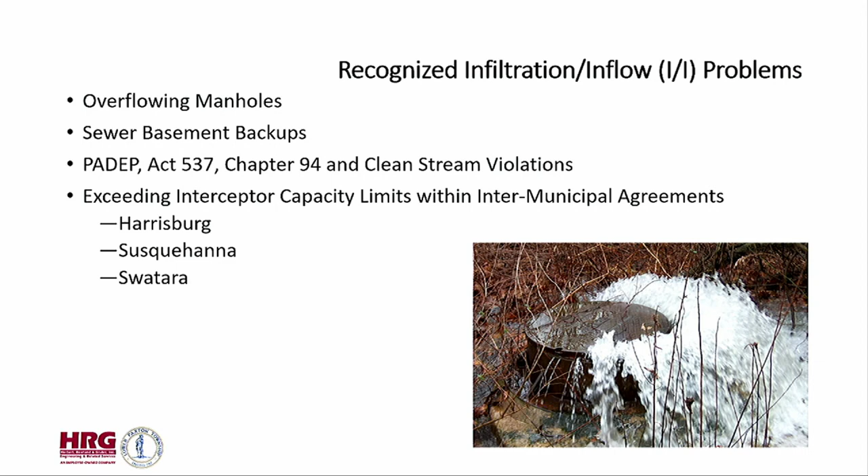Sort of why we're here: we had sewer overflows back in 1993, basement backups, which resulted in a DEP Chapter 94 and clean stream violations. We also exceeded our interceptor capacity at Harrisburg, Susquehanna, and Swatara.

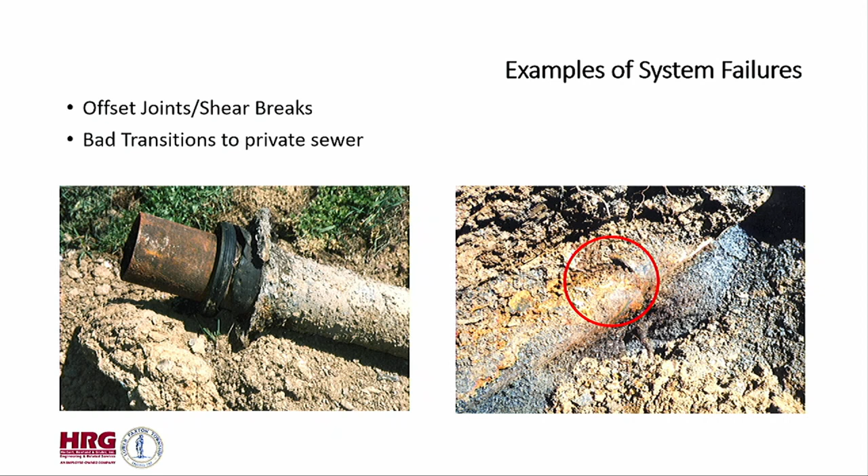The reason for these overflows and backups: the system was built in 1970 and made out of asbestos cement pipe, which fails, especially at joints. You can see in this photo to the left where this joint failure occurs, and then you also have actual missing pieces of pipe from improper backfill. There's another close-up of a missing piece of pipe that's actually in the building sewer portion.

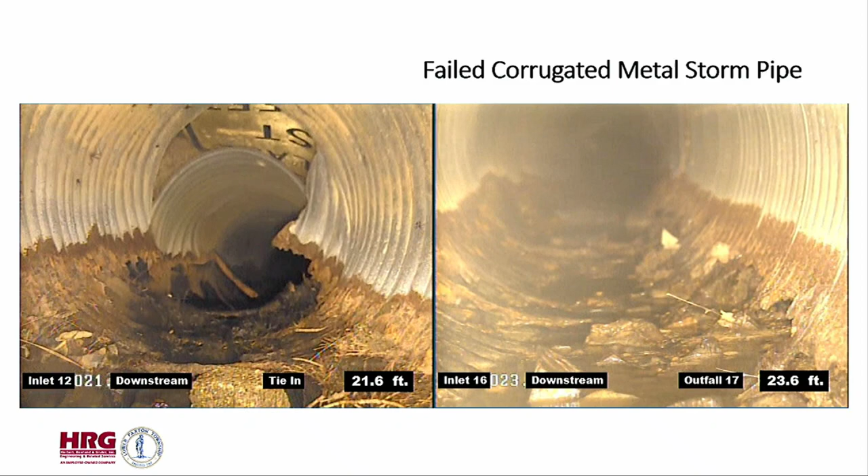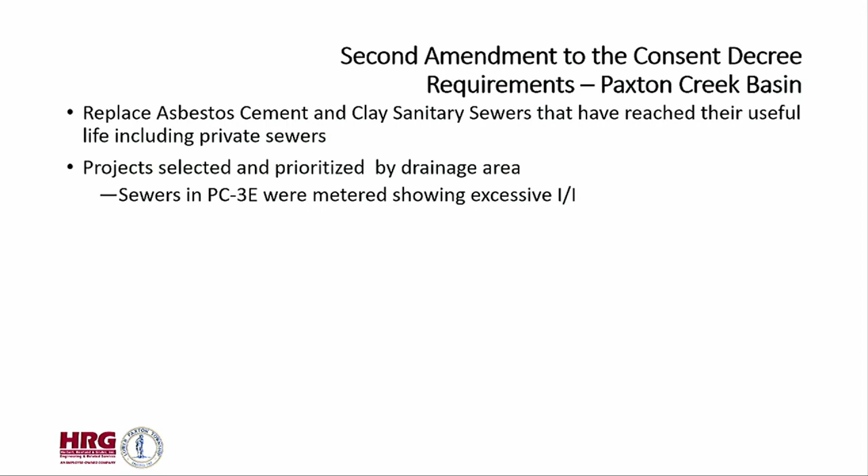A little bit more about the project and the deadlines for the sewer part. Our plan is to replace all the old cement pipe and the clay sewers. Your project was selected and prioritized based on sewer flow metering, and PC-3E showed excessive infiltration when metered during a storm event.

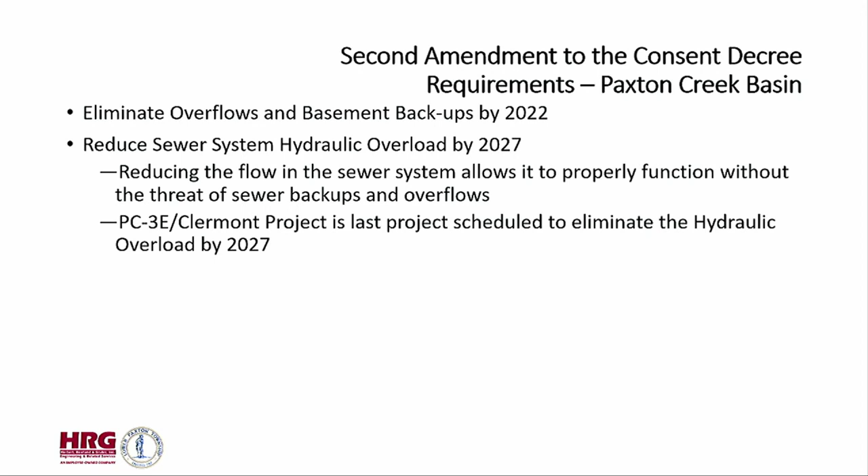So our goal was to eliminate the overflows and basement backups by 2022. This has been accomplished except for this area down to Goose Valley Road, which will show - that's our last overflow remaining in the township. Then the hydraulic overload must be reduced by 2027, and this Clermont project is the last project scheduled to eliminate the hydraulic overload by 2027.

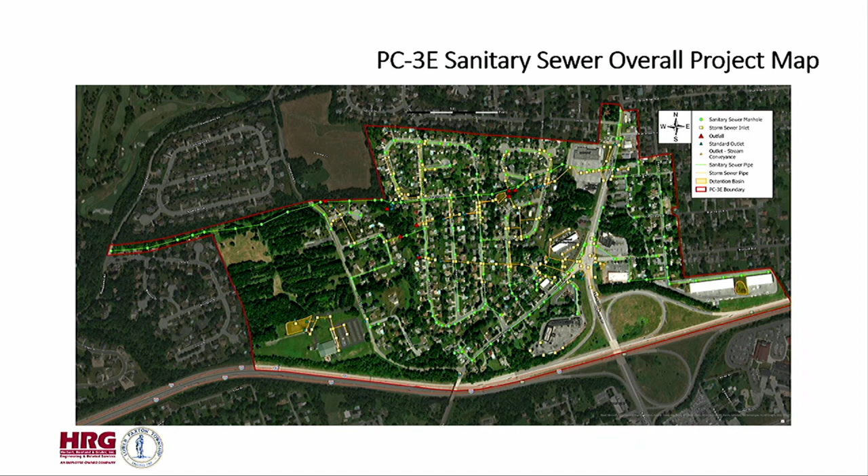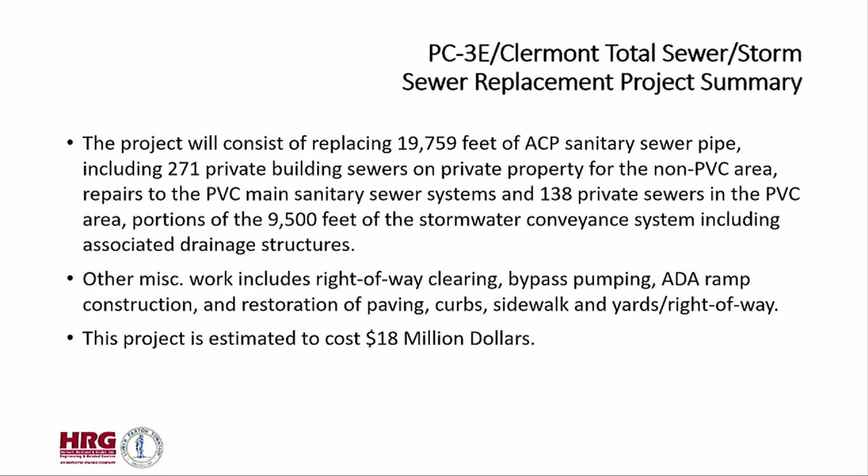The project will consist of 19,000 feet of sewer pipe, which also includes the private sewers. Most of you have already received those agreements for the sewer part. Also, we have 9,500 feet of stormwater, including the drainage structures - that's why we're here today. Also miscellaneous work, and this project cost is estimated at $18 million.

So the acquisition of these off-street easements: the DEP requires the sewer and stormwater projects to be minimized for impacts to streams and wetlands. So we will be required to acquire new easements from property owners with existing sewer easements to relocate the sewers and to minimize the impacts to wetlands and streams. These off-street sewers are owned by the authority. Off-street storm sewers are owned by the property owner.

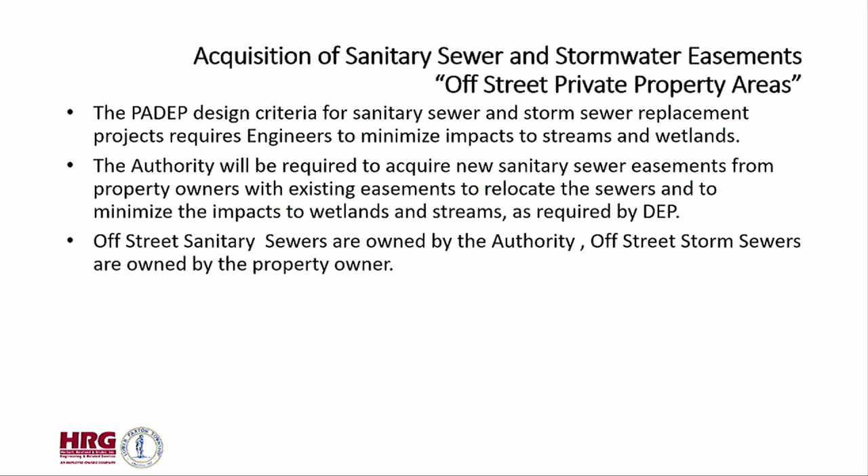So we have 5 types of these off-street easement documents. We have 26 of you that received the private storm sewer replacement agreement, which we'll go through. Then we have 9 off-street combined sewer easements that have a permanent easement and a storm sewer temporary easement. And then we have 23 sanitary sewer permanent easements and temporary easements.

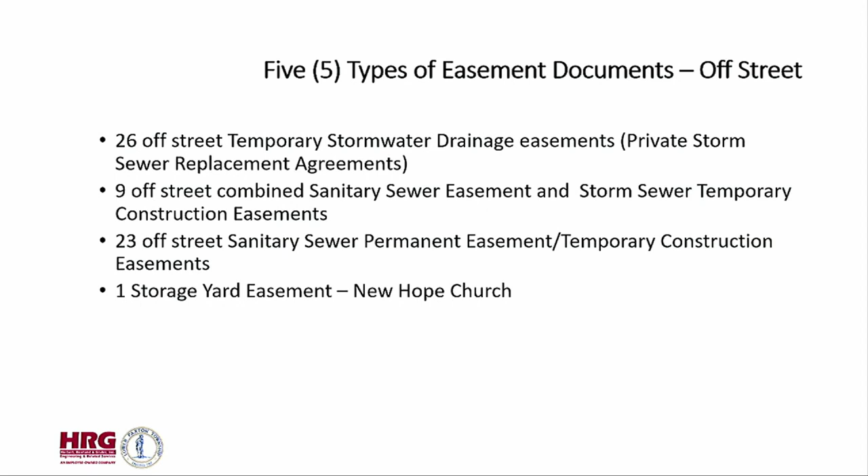And we're working with the church. They graciously have provided an area for our storage for the equipment and materials for our contractor.

So a little bit about the private storm sewer replacement agreement. This was drafted by our solicitor. It basically provides for all the work to be done at no cost to the property owner. We highlighted this one phrase here to make sure property owners understand that after this work is complete, we don't assume the maintenance—any maintenance will be required by the property owner. The storm sewer is going to be built with PVC, so it should last and not require maintenance.

There could be some of you that have storm sewer inlets that could require some maintenance. Essentially, the storm sewers that are off of the public right-of-way are owned by the property owner. This agreement allows our temporary access to do the project, and then when the project is complete, this temporary easement automatically extinguishes, and the maintenance and ownership reverts back to the property owner.

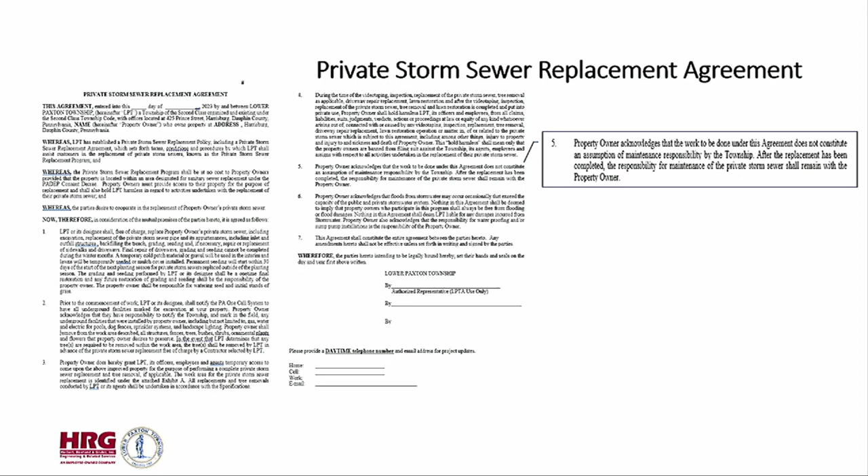So each of you that received this private storm sewer replacement agreement—there were 26 owners receiving this. This is just an example of what that exhibit looks like attached to the agreement itself. It shows a legend with the crosshatch of the temporary construction easement area, and that'll be the area that, when you sign the agreement, you're allowing the township and its contractor access onto your property to do this replacement work.

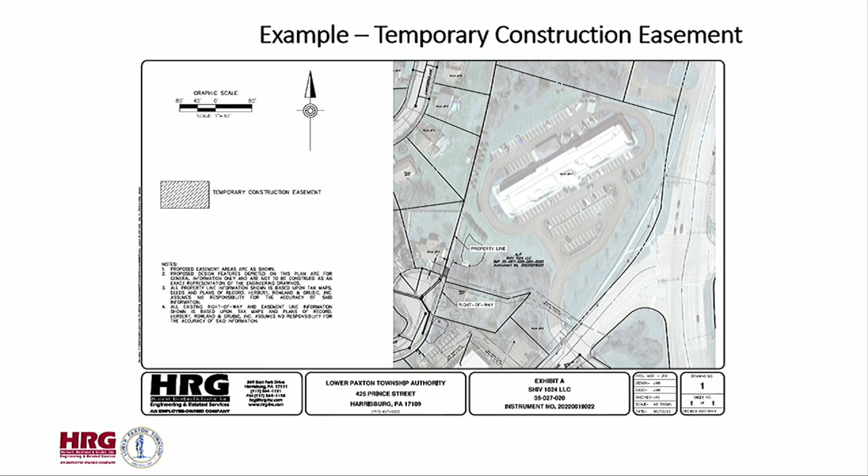For those of you who received the sewer portion of the project, you have a sewer easement on your property, and this will be permanent. This provides a detail showing what is existing and what is new permanent easement because the sewer had to be relocated. Some of you may have an agreement with much less of a new permanent easement—it really depends on each property owner and how much the sewer was moved.

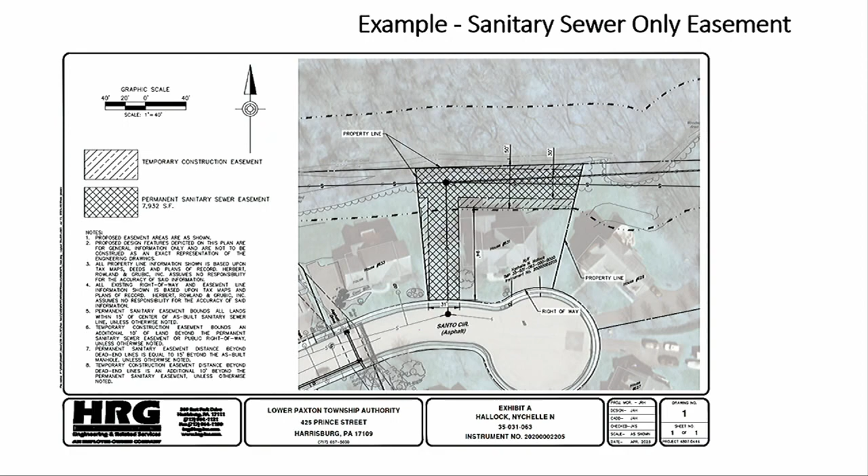So the schedule—we'd like to get the property owner meetings done, which John will go over in a few minutes, completed in the next 2 months. Receive all the easements, complete the design in September, bid in December, award in December, and have construction start sometime in March of next year. It's a 1.5-year project, so we anticipate being done at the end of 2025.

So upon request, staff and an engineer will meet with the property owners to discuss the easements and address any concerns or impacts the easement may have on your property. We encourage you to schedule these meetings—John will go over that in a few minutes.

Following construction, all easement areas will be restored to the existing condition at no expense to the property owner. Obstructions over the sewer will be addressed on a case-by-case basis—some of you could have sheds, fences, trees, etc. In most cases, sheds can be relocated, fences temporarily removed and replaced, and trees replaced in a different location adjacent to the easement area.

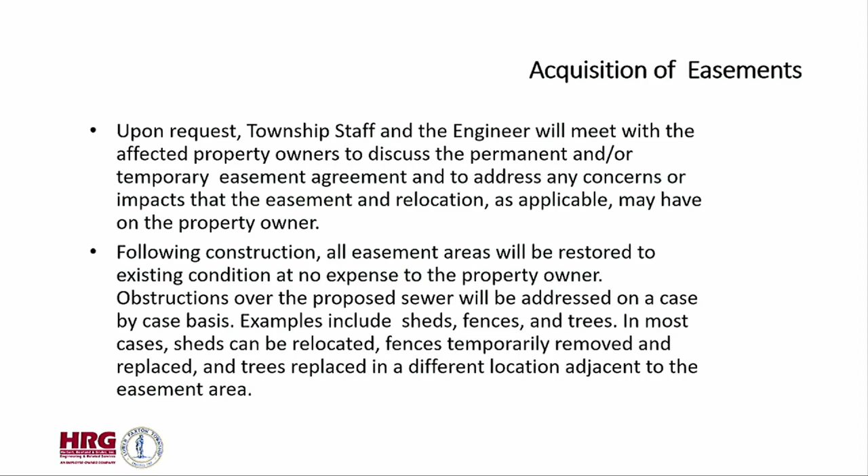And I'll turn it over to our engineer, John.

Thank you, Bill. This is a draft work zone map with the entire project scope included. This map will be finalized over the next couple months as the final design details are worked out, and posted to the website. This is how we anticipate the contractor working through the project through these different zones in the neighborhood. Once the design is finalized and after the bid and award of the contract is done, this will be finalized and placed on the website for homeowners to reference and follow the project.

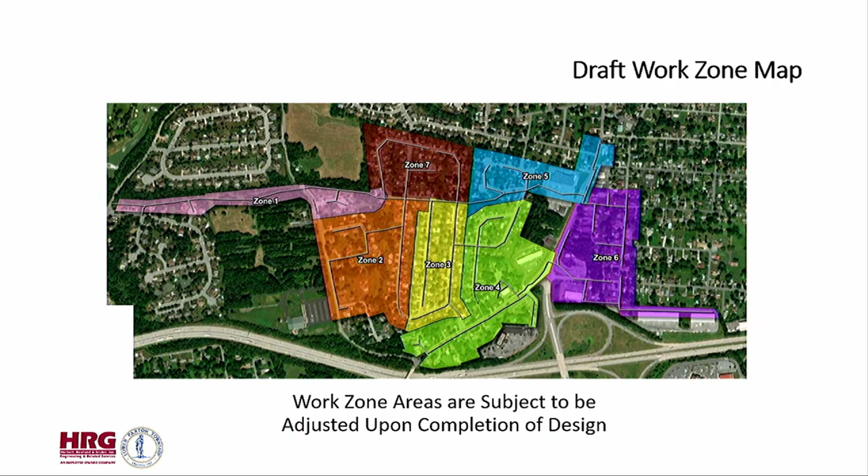Ahead of time, the contractor will place no parking signs along the street, designating where they'll be that day and assigning places to put things. Please bear with us as we move through the project and monitor the no parking signs, and where the contractor is, to see where they're going to be next.

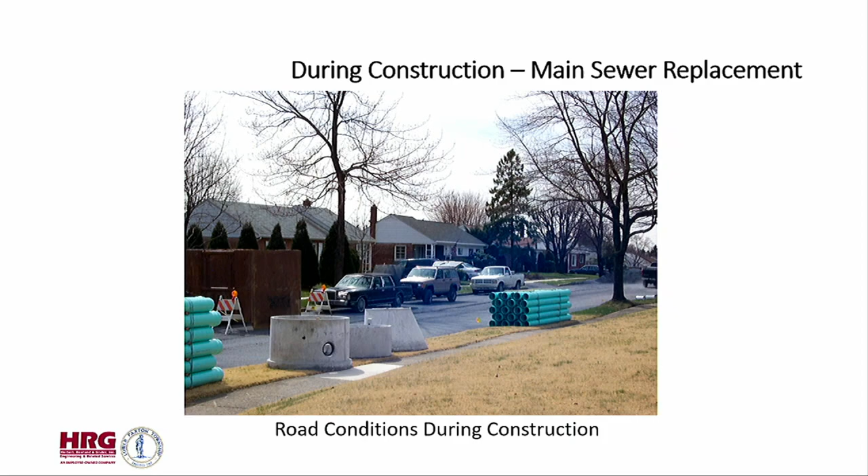This is a combination excavation and trenchless project. These are a couple pictures of some of the sanitary sewer lining. The liner is a felt material that is dipped in resin and then blown into the pipe. It is a trenchless solution, and it's part of the project.

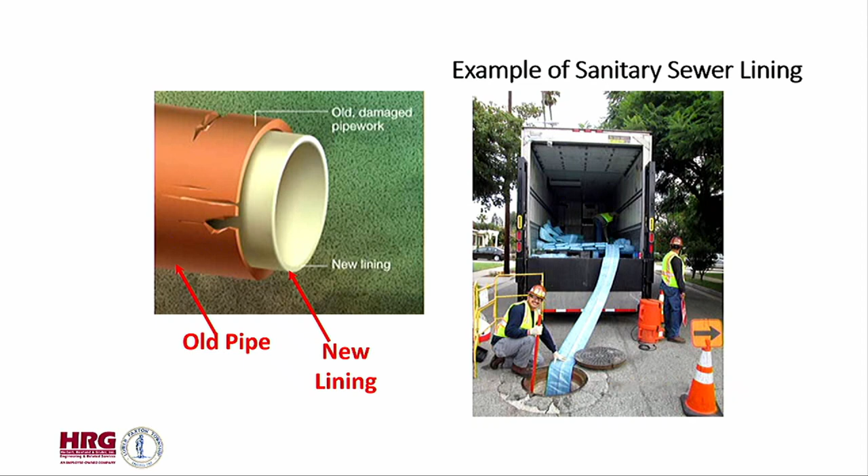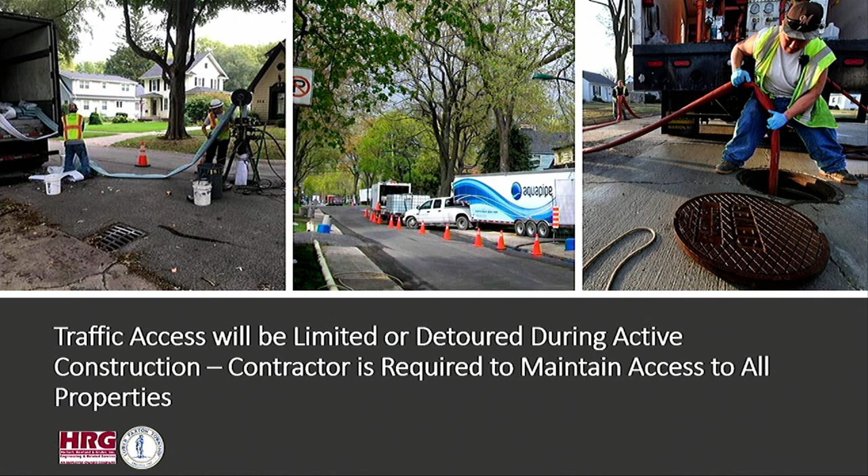The only disruption with the trenchless method is traffic control. The contractor will set up traffic control, mostly detours in the neighborhood while this is happening. Most of the roads in the neighborhood for construction will be detoured, but you will still be able to have access to your property.

We request and ask that you exercise some patience with the contractor. If you're trying to get to your house while the road is detoured, all we ask, and the contractors ask, is that you come up and say, hey, I live at this house, I need to get in. They will make arrangements for you to get in and out of your house during construction.

Also, as part of this project, as Bill alluded to, and why you have the agreement, the storm sewer facilities will be replaced. Most inlet pipes will be replaced with updated poly pipe and concrete structures. Everything's going to be upgraded to current PennDOT standards.

Some pipes were done previously under a project about 3 to 4 years ago. Those pipes are going to remain in the ground. This is for the other pipes in the neighborhood that are the failed corrugated metal pipes.

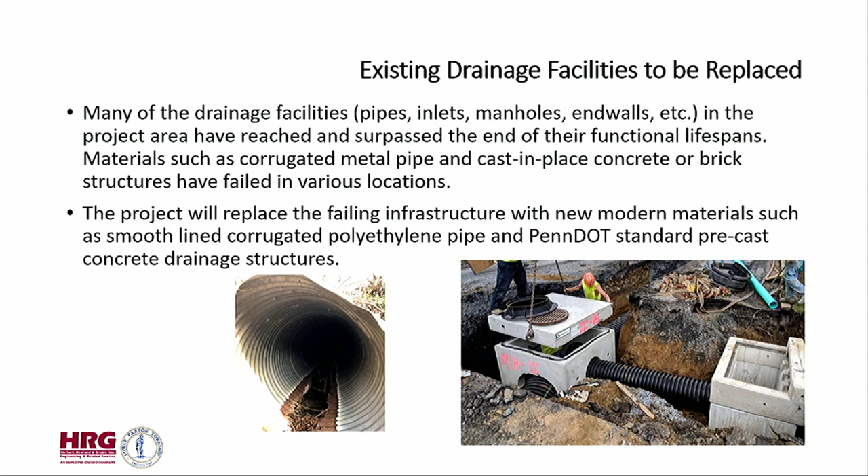As a property owner, you've received this agreement. If you wish to schedule a meeting with staff to look at the easement area and discuss how the construction will happen, feel free to do that. My information will pop up here in a minute.

We ask, especially for these off-street storm and off-street sanitary pipes, that you let us know of any underground utilities you may have. People have private gas lines, private water lines for swimming pools, sprinkler systems, invisible fences for dogs. Please let us know. If any of those are affected during construction, they will be repaired, but we ask ahead of time if you know about them so we can plan around them.

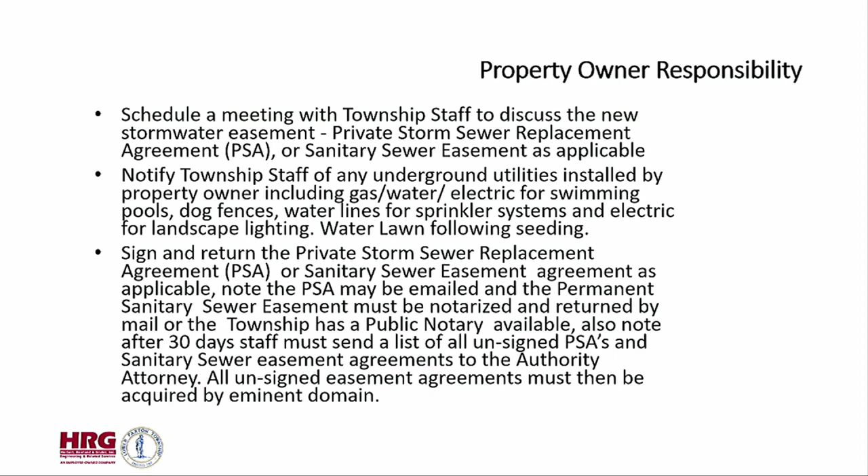Finally, the last responsibility is to sign the temporary agreements and return them to us. If it is a sanitary easement, it will need a public notary, which we have available here at the township, and we can let you know how to access that during normal business hours. All unsigned permanent sanitary easements will be acquired by eminent domain as part of our consent decree with DEP.

The benefits of these projects: old systems that are failing and need to be replaced and improved. Also, as part of these projects, the neighborhood will be paved, the storm sewer will be upgraded, and the environment will be protected by the elimination of overflows and backups.